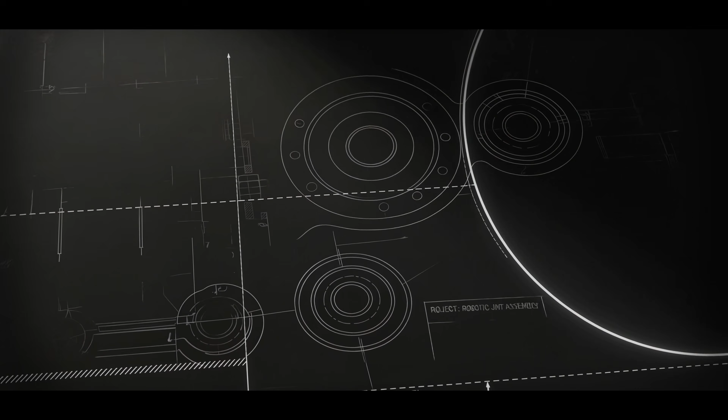The first thing that made Leo AI stand out to me was the fact that they had real customers using it for real problems. It's doing the legwork, it's going out and getting the information for you and putting it in front of you and saying, here it is, and here's where I got it from.

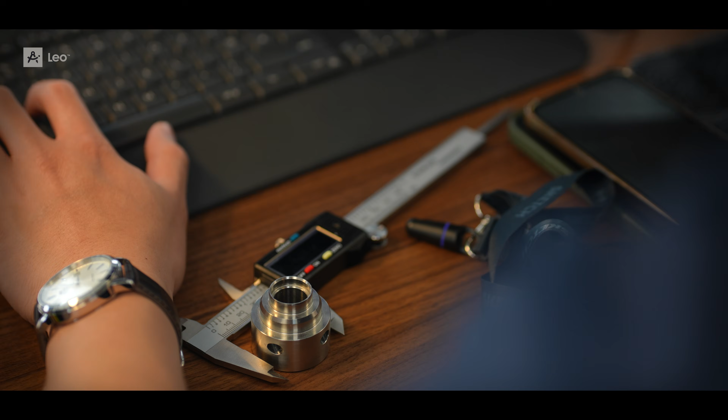To allow mechanical engineers to turn their ideas into physical products faster than ever before. Much more focused on innovation and much less on pipe routing and the screw choosing.

With Leo, I rely on the way he showed me, the equation, the numbers. When I see it's everything checked and everything is right, I'm way more confident. It's removing that hesitation. So I'm not relying on it perhaps, but I'm doing much better work.

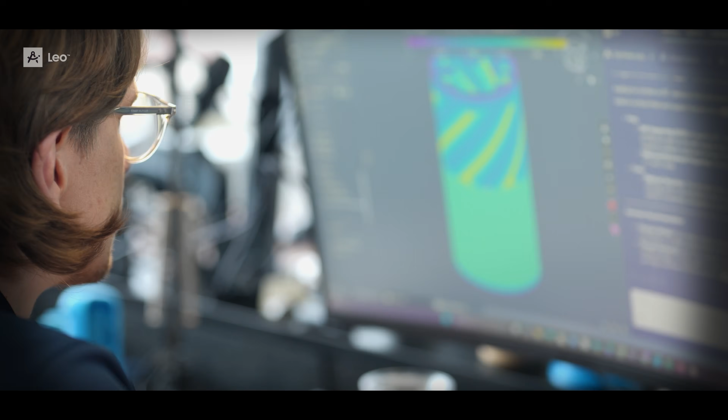Leo was able to really make a 3D prototype, generate a much more detailed, much more accurate result. The Word document that came out was even just nicer and more nicely formatted.

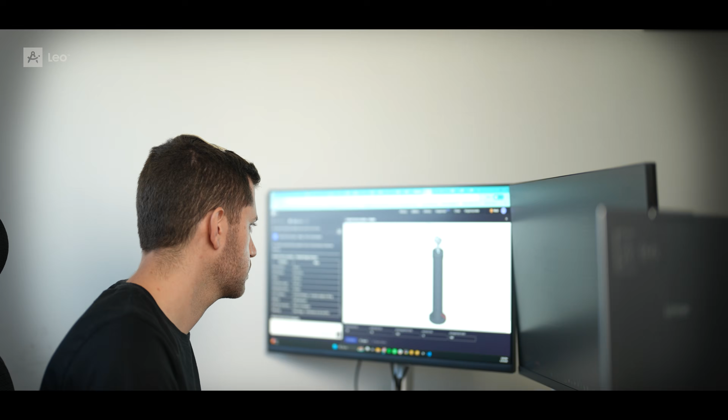Leo is trained and can also reference over 1 million pages of engineering handbooks. We connect it into your organizational systems so it knows your context. It allows you to answer questions based on your documents, based on your CAD.

It's mechanically based. I can not only trust it, but I can actually verify it. It's not to replace the engineer, it's just to support the engineer. There's so many hours of time saved.

It was producing tolerance analysis within seconds. What might have been an afternoon's work becomes half an hour. Less things that are annoying and more things that are engineering, that are actually interesting.

We were cutting build time down by 47%. And you can see millions of dollars just vanish from your expenses just because you did this process with Leo.

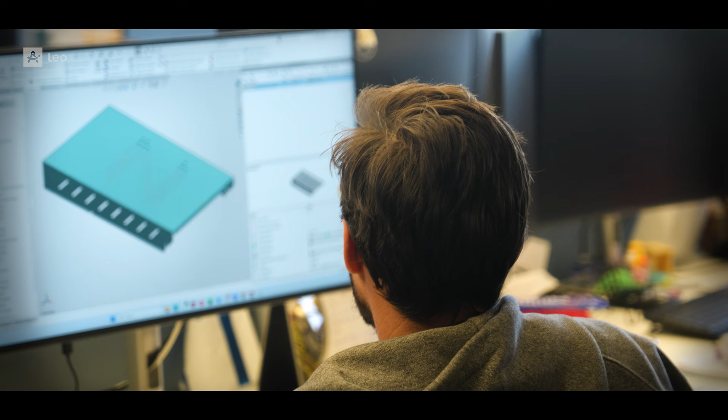Really, think of AI for your engineering organization almost as a force multiplier. Yes, there's a team of 4, but actually there's a team of 5. Because Leo acts as the 5th member of the team.

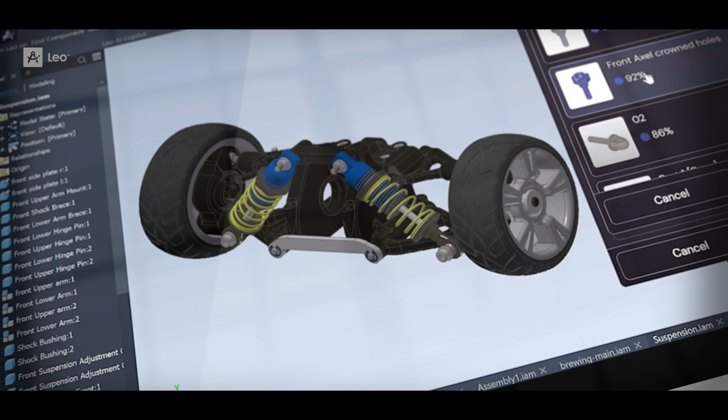Now I can look and act and behave and deliver like a team of 100. Actually, trying to learn how to use it was really easy. With Leo, it's generating the calculations, it's generating the model, and then even further now, I have the assembly inspector.

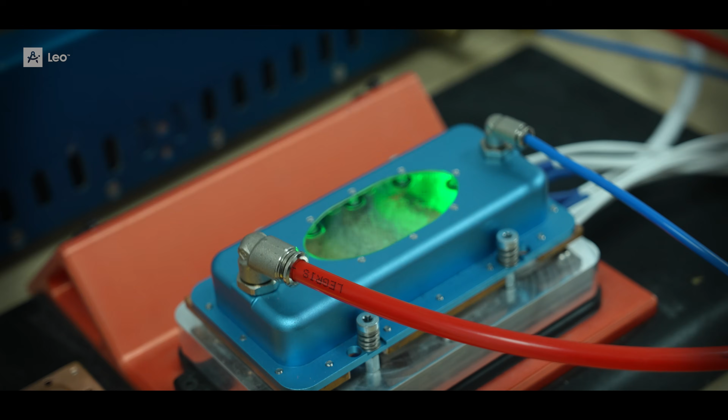You're going to get left behind very quickly. Efficiency is the real key.

This is going to be a unified workflow for all mechanical engineers. How could we go back pre-AI and pre-Leo AI? It would be inconceivable to do that.

They're adding the new features and they're pushing it on. It's like, oh wow, I have a new superpower. I can do this now.

Leo AI is not an add-on. It is going to be the workflow. And we're going to change how humans build products.

Leo AI is part of that second half of the story, the great story of software tools helping engineers. This is a wave. Ignore it at your peril, but it is a wave that's going to happen.